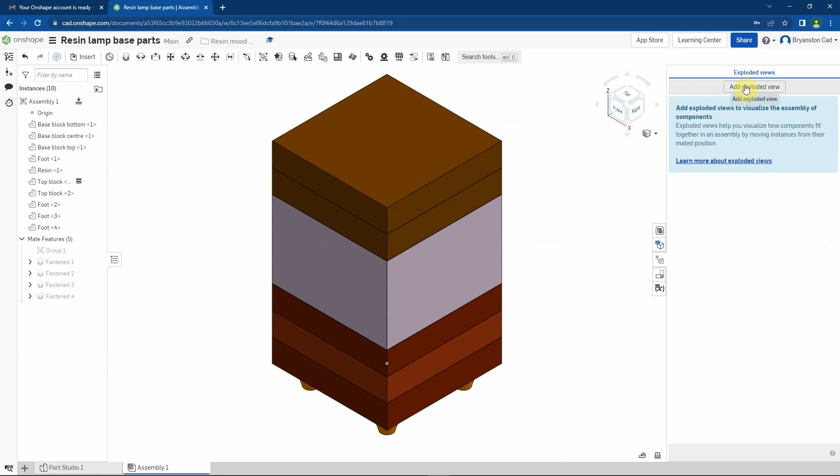So to do that, we're going to use the Exploded Views tab on the right hand side. I'll left click on there and you'll see it brings up this space that takes up a lot of room. I'm just going to drag that over a little to give us more working space. The first thing I'm going to do is click on Add Exploded View. So you can see we're editing Explode 1. I'm just going to use the mouse wheel to zoom out a little.

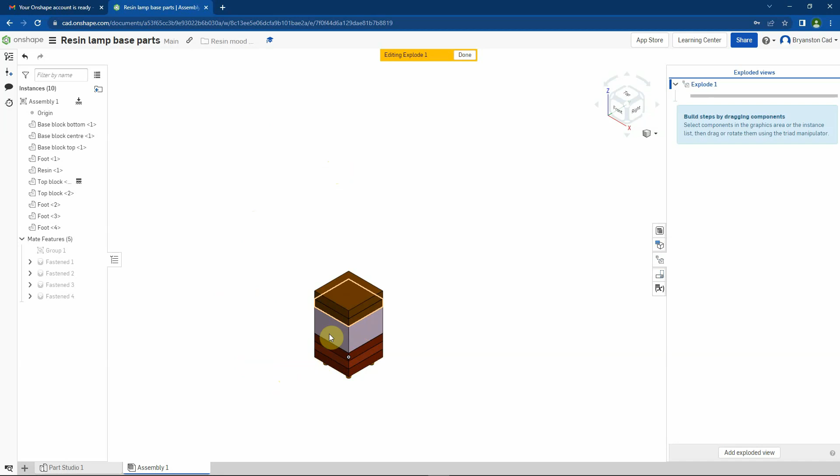There we go. I can do this in a range of ways, but what I'm actually going to do is select all of the parts apart from the feet and gradually pull everything upwards. I can do that on the model, or over here if I want to. So I can select each of those parts from the menu, leaving the feet. I've selected one there, so let's click on it again to unselect it, and I'm going to drag that upwards until we can see the 4 feet. Once I've done that, I'll left click to say I'm happy with that step.

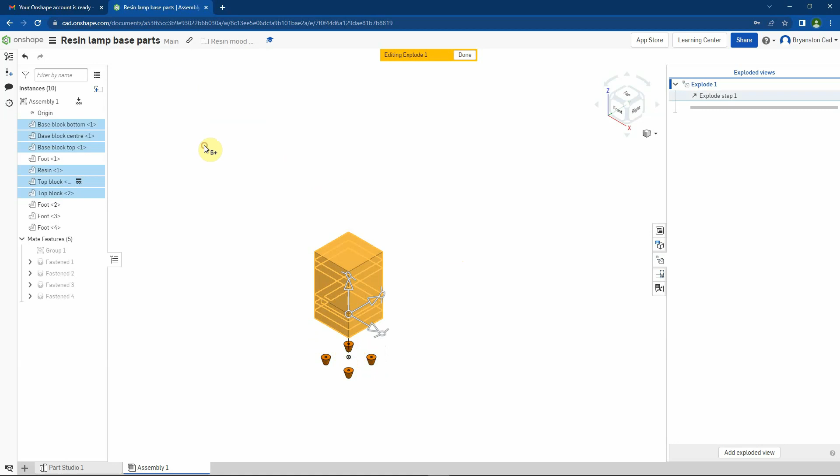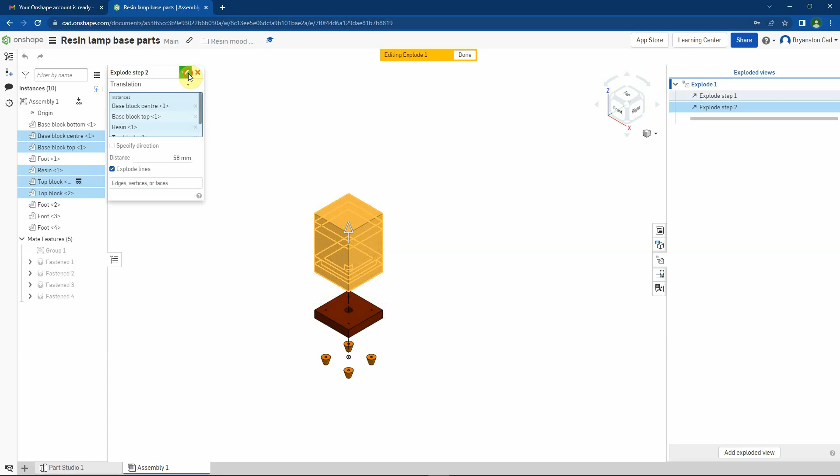I'm then going to left click in space to unselect everything, and then select everything apart from the bottom layer. So let's go through and do that. I don't want the bottom, I want the center, the top, the resin, and the 2 top blocks, and I'm now just going to drag that up slightly until it's clear. We could have a slight overlap if we wanted to, because there's going to be quite a lot of stuff there.

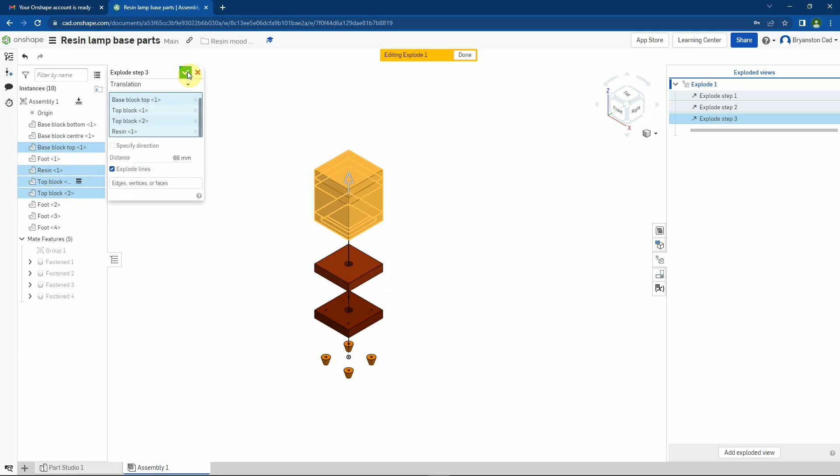Left click to confirm, left click in space, and let's go through those again. In this case, well, both top blocks - it's the bottom block and the block center I don't want. Drag that up a little bit. Now I left the resin behind. If I left click on the resin, it should follow up. Left click to say I'm happy.

Left click in space. Okay, so this time let's just select the blocks that I want on the screen. So I want those, makes it a bit easier. Just drag that up again. Left click to say I'm happy. Pick the last 2 blocks. Drag those up. Left click to say I'm happy. Click in space. Select the last block. Drag that up. Say I'm happy. So there we go.

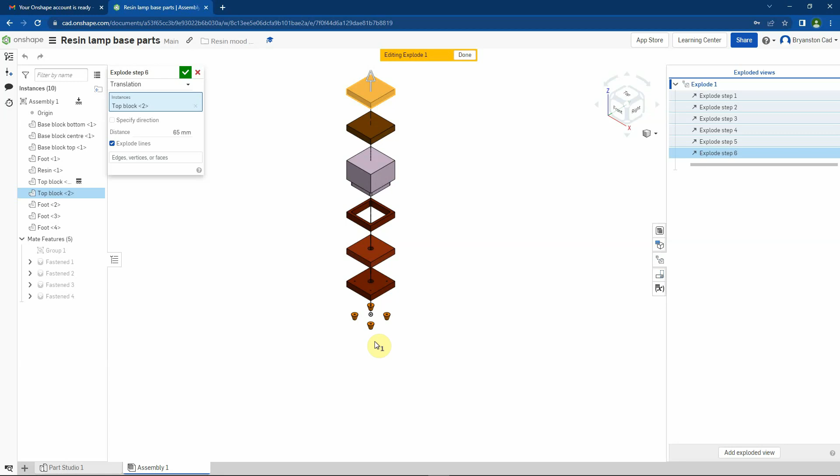There's our exploded drawing. If we'd shown fixings like the screws to hold the feet on, we might have pulled those down to show where they fit. But we're happy with where everything is at the moment, so we're done with that exploded view. I'll left click to say we're done. It puts it back, but we can swap between the two if we want.

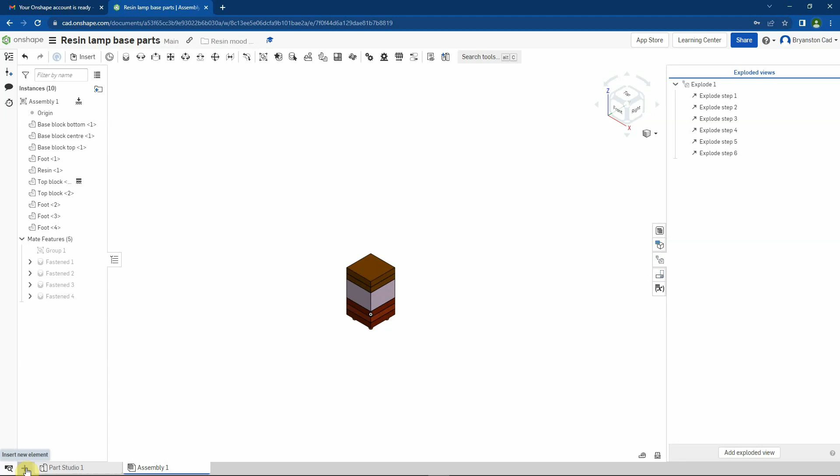So how do we turn this into a drawing? Well, we need to create a drawing, so let's do that. In the bottom left hand corner of our screen we've got a little plus sign. If we left click on there, we've got the option to create a drawing, so left click on there. There are some pre-selected templates. I tend to use a custom template when I do mine because it means I can pick the options that I want, and arguably in the UK at the moment we use a bit of a mix match.

We tend to have drawings in 3rd angle, which is known as the American angle or American system. It's easier to understand, and most places now draw things in 3rd angle. It's become the preference, but we want to use ISO paper sizes.

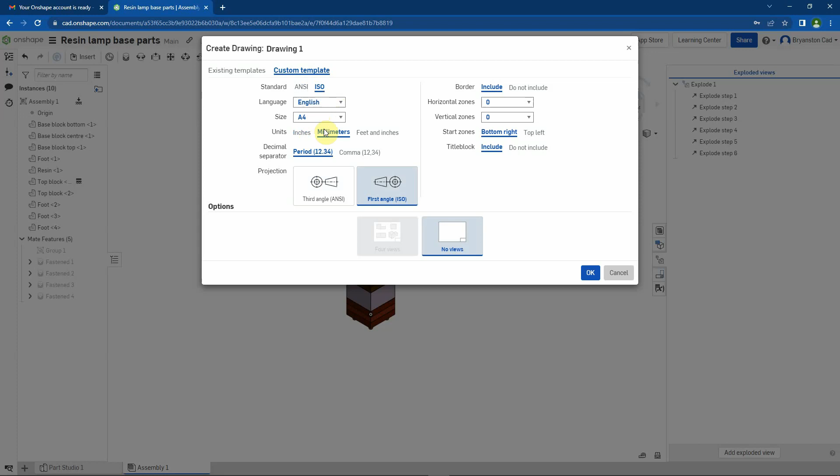Click on ISO, and you see that it jumps to 1st angle, A4. Now I'm aware some of you might be doing this in prep schools and might not have A3 printers, so let's do this on an A4 portrait piece of paper, especially as we've got quite a tall assembly.

So English A4 portrait, we'll go 3rd angle. Not that it's going to matter because we're going to be drawing an isometric, and we can include the boxes or information around the outside of our paper. Click OK, and that takes us to a blank piece of paper, and you can see we've got our title box in here that we can go in and edit if we want to.

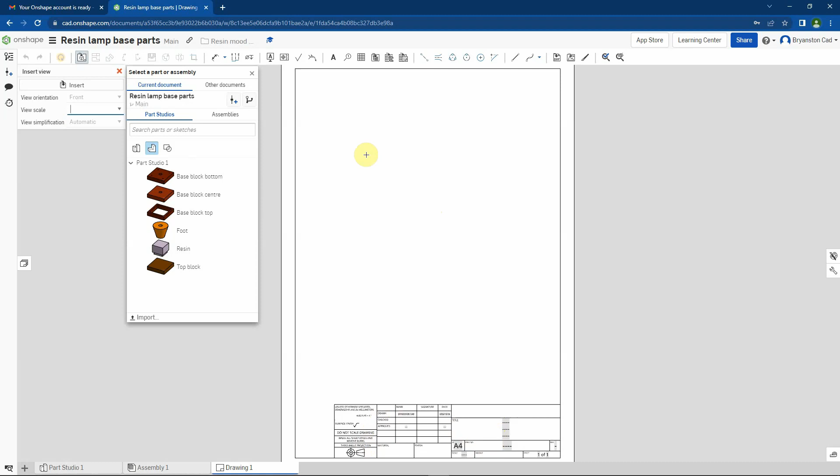So we can select a part or an assembly. We're going to select an assembly, so let's left click on assembly, and we want assembly 1. We've not renamed it, so it's just called assembly 1. We can see it wants to draw it half scale, and we get a preview of what it's going to look like.

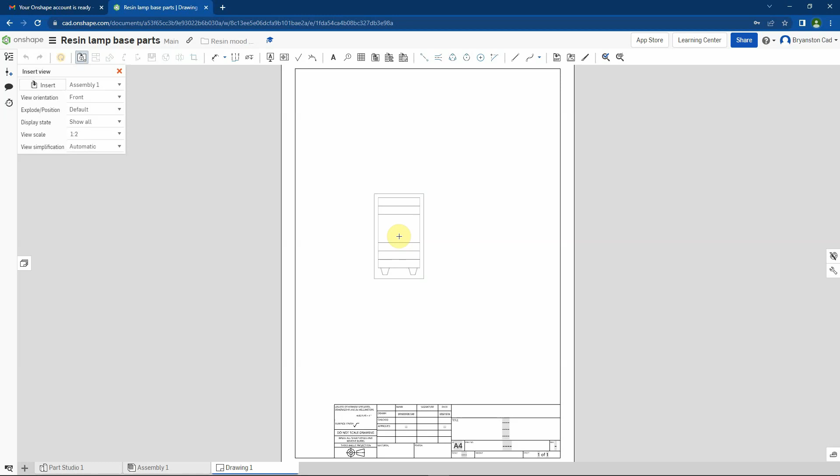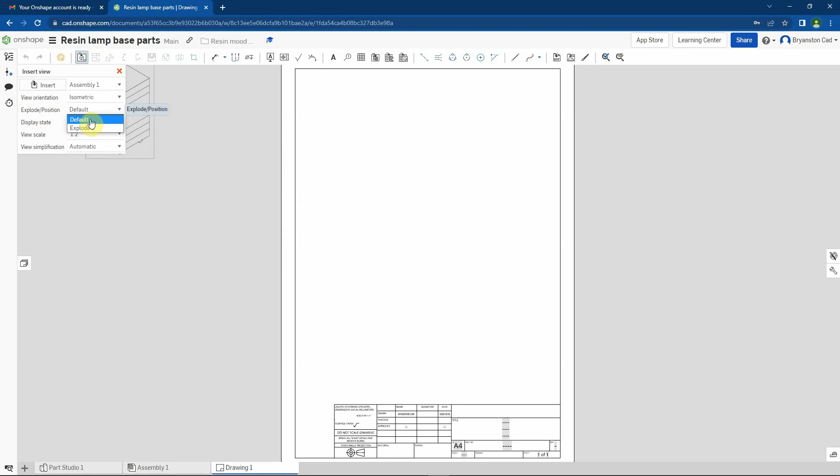We want to do an exploded isometric, so our view orientation is not going to be front, but isometric. With the same settings it gives us a nice view, but we want to change it so it shows in its exploded form. Where it says explode/position, we change that from default, click the arrow to explode number 1, and we can see that's probably just going to fit in. So let's left click to place that, and we now have our exploded assembly drawing.

Now we can label this with balloons. We can do it automatically, or insert a little table that we could edit. It's probably a little too far for the context of this to start playing around with naming parts and using part numbers. But what we can do is look at ballooning it, so we can add balloons. If we look here, we have different callouts, and we can assign each to one of our parts if we want to. However, because we haven't set up a table, it's not going to number them.

If you were doing this with students, they could do a screenshot of this and put it into their folder work. You could get them to create a table in Word or Excel with the different parts and part numbers, and let them draw circles with numbers to label all the different parts. The software will do it, but you've got to play around with the table first, setting properties for each of the parts we've drawn. I think that's probably a little bit beyond what we're trying to achieve here.

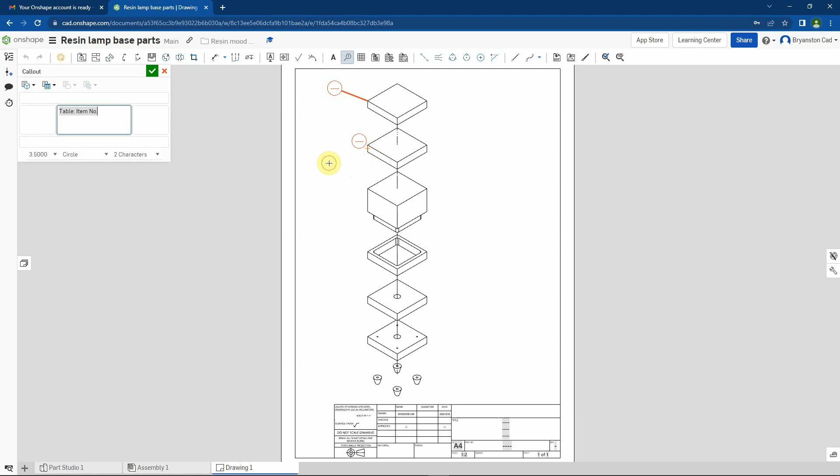But we can see that we've got an exploded assembly, and I'll just delete those balloons. From this you could do a screenshot, or save it, or print it. You could even print this off and let students have a go at rendering the different components, and see how the different parts fit together. You could use this simply printed out as an instructional sheet as well.

I hope you've enjoyed the tutorials, and that it's given you a bit of insight into how you might be able to use Onshape. We use it with all of our students from Year 9 and upwards, and it's a really useful tool that allows them to create components they could then manufacture on 3D printers or on CNC milling and routers.